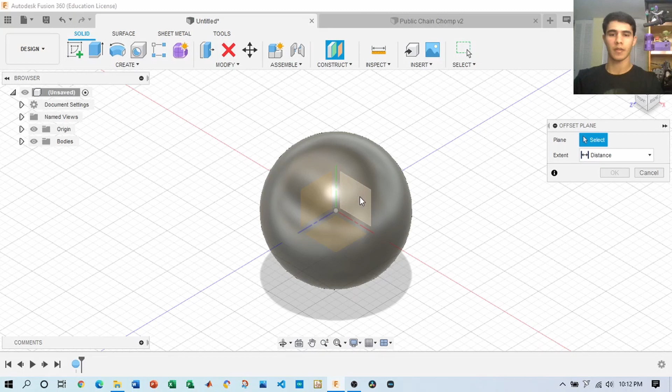Right out of the bat, we got most of the work done for the general shape of the Chain Chomp. Now what we're going to do is construct an offset plane to this sphere, and this offset plane is where we're going to make the sketches.

Let's go ahead and make this offset plane 60. 40 is good. And then, as you'll notice, we have under construction our plane.

If you want to, you can disable it, just click on the eye icon. Let's say we want to edit this plane. I want to switch it from the orientation it's currently at.

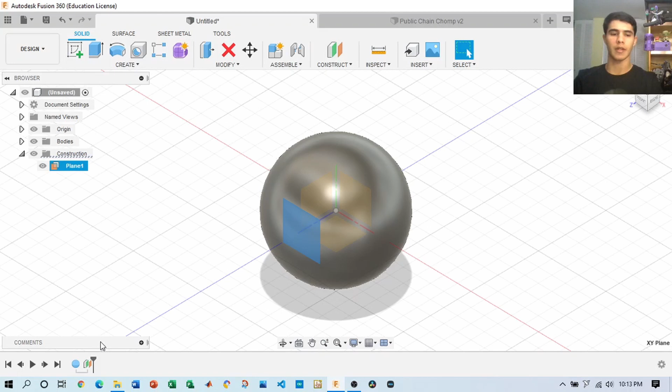So all I need to do is click here, edit feature. And let's say I want to switch from this plane to this plane. Now it's 40 millimeters on this other plane.

Perfect. Now we're going to create a sketch. And on the sketch we're going to make a cut for the mouth of this Chain Chomp. 40.

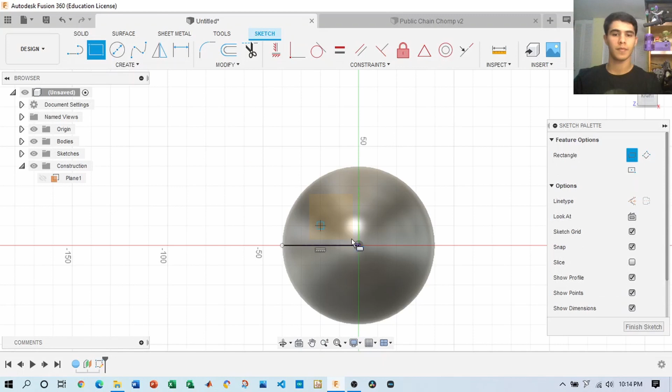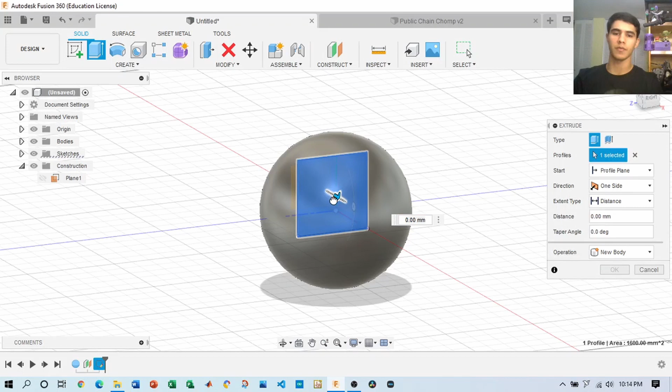So we made a square, and now we're going to extrude it. We'll go ahead and click extrude, choose your profile we want to extrude. In this case, we're going to cut through the circle, cut through the sphere.

So it kind of looks like Pac-Man right now, and that's okay, that's what we're going for. We cut through this body, and you'll notice now we have the general profile of the Chain Chomp.

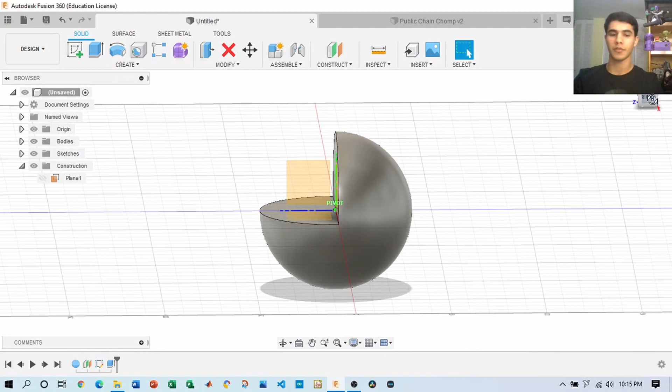So what's next? What you could do next is add the eyes. Just go ahead and add the eyes, and to do that, we can go down here and edit our feature for our previous sketch. Looking at the image of a Chain Chomp next to me, more or less the eyes are situated to the sides of it. I would say here.

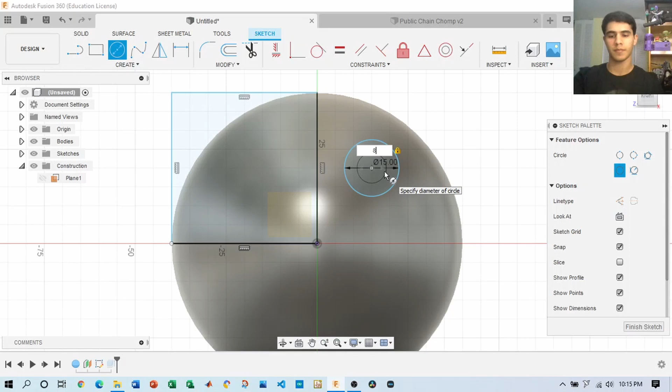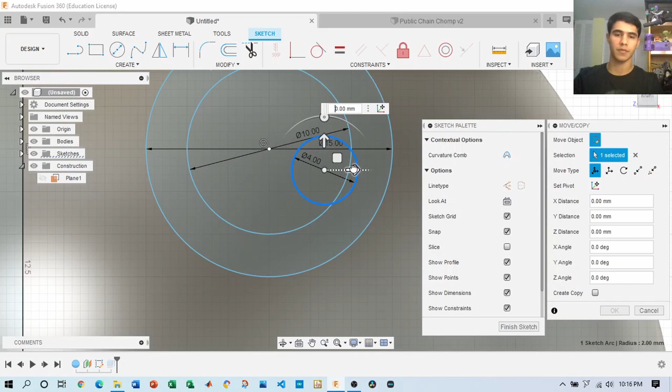On the shortcut, what we can do is click M for move, or you can go here, click on your mouse on the right, and then just click move and copy. And it gives you the option to move your sketch to your preference.

So we have our sketch profile. In this case, it's going to be the eye for the Chain Chomp. So what we're going to do now is create an advanced feature where we extrude this sketch onto the body, and by extruding it, we're going to be able to create a curved surface area.

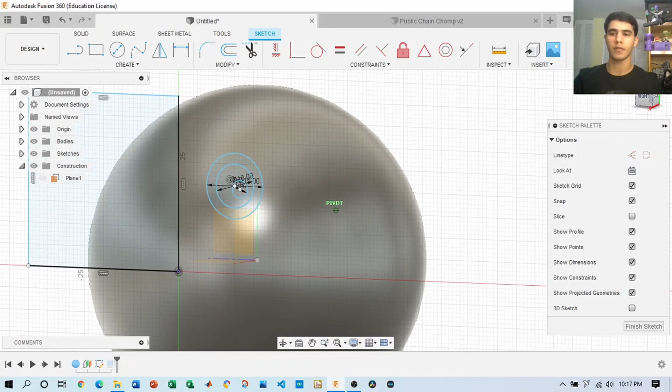Because right now this is a solid body, but it's not curved. So let's go ahead and finish sketch. And you'll notice under sketches, now we have our sketch profile here, along with our plane.

So let's go ahead and extrude our eyes. Before we do that, let's move this body, and it will be necessary for the feature we'll be using in a second. Move and create a copy.

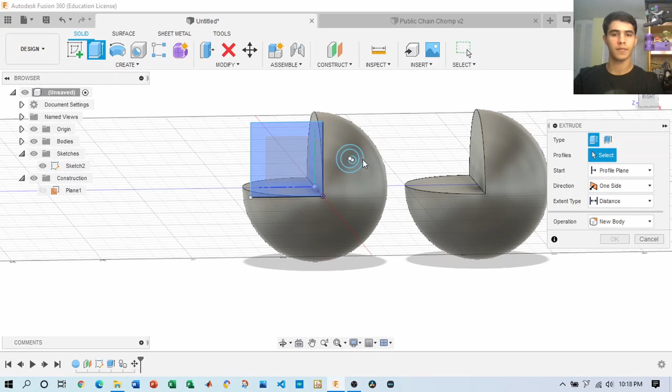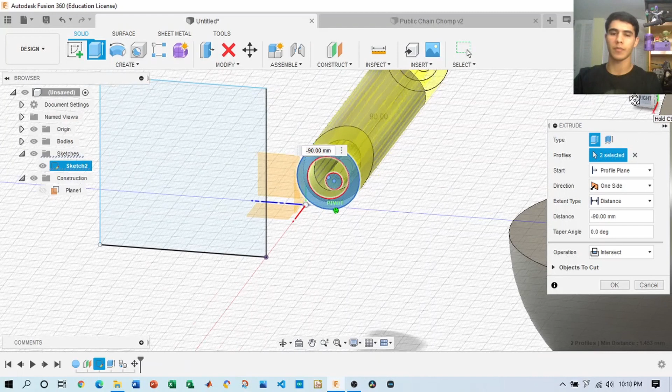And we're going to extrude this now. We're going to extrude it in a way that intersects this sketch profile and the solid body, in this case, of the Chain Chomp. And how does it look like? It looks like this. We're going to need this to make this curved profile for the eyes.

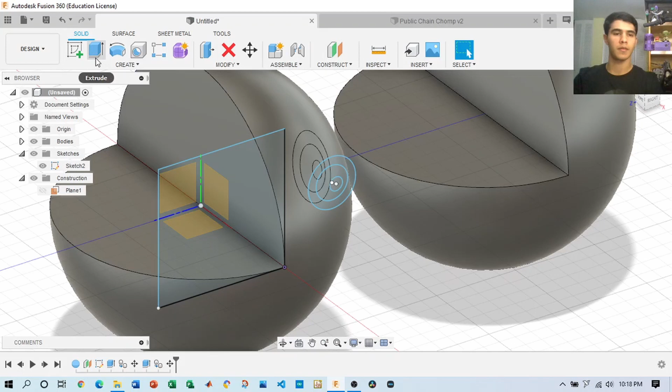Let's repeat this again, and we'll repeat it with the inner eye. This eye profile. Intersect. And we'll intersect in a way that cuts through the solid object. Now we have our eye profile and our main body.

So let's go ahead and move this body back.

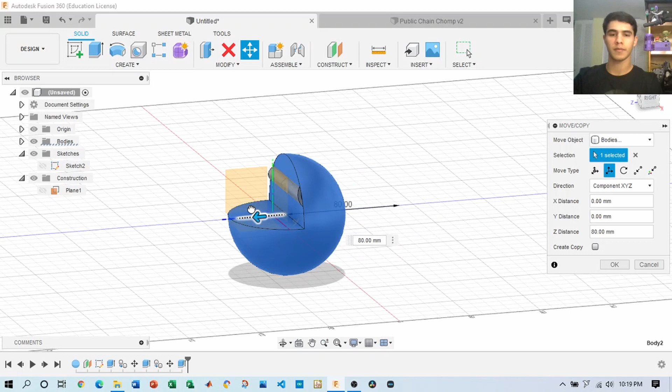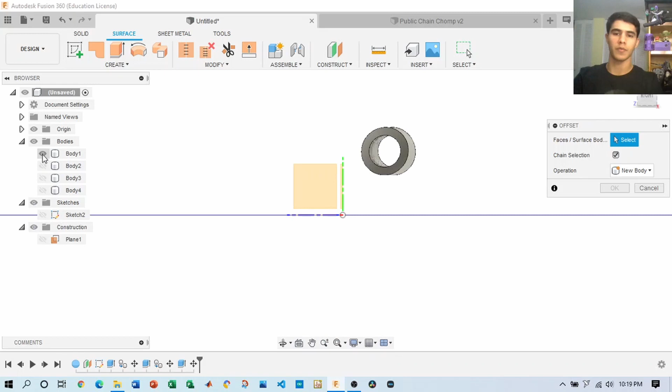With this we can create a surface offset on the eye. Right now this is a solid body, and we have 4 different bodies under it: body 1, body 2, body 3, and body 4. But we don't have any profile on the eyes. Let's say we want to create a sketch or extrude on these eyes - surface offset allows us to create a surface body on these profiles.

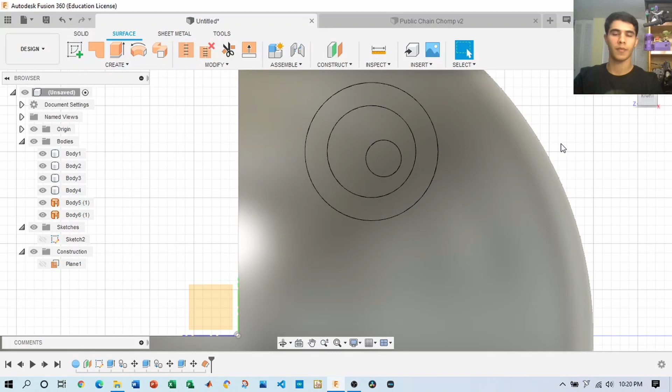You'll notice when you add these new surface bodies, they're directly on the surface of the profile that was there before. So we'll repeat this with the inner eye, and now we can go ahead and thicken it.

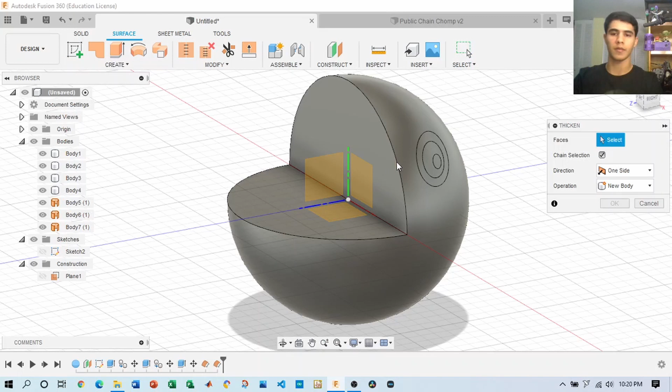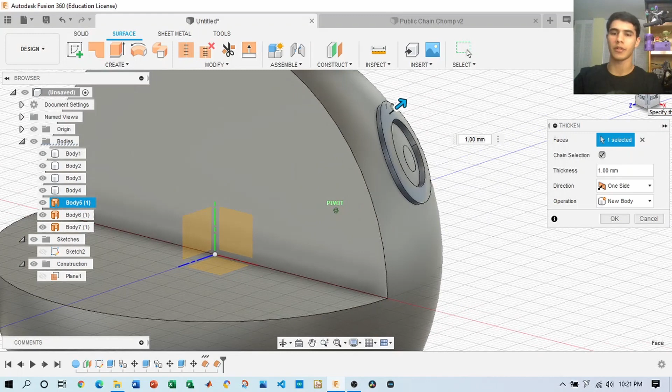Thickening is going to create a natural thickness on the surface offset, which gives the impression, when you 3D print it, of a thicker layer. You see how you're now extruding on a curved area? Just go ahead and change these values to your preference.

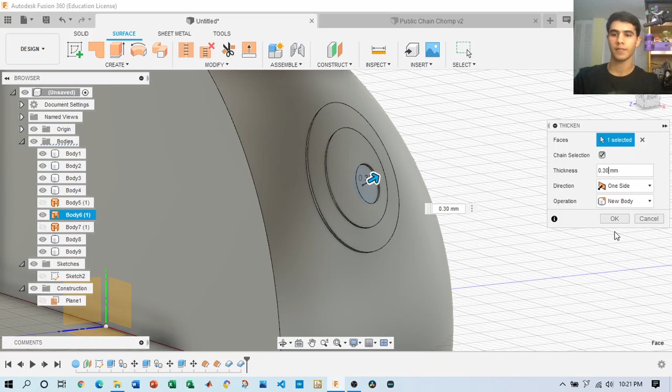So we have it on one side, and you notice we can repeat the same function on the other side. Let's go ahead and do that. We want to mirror the features we incorporated right here, along this plane. And now we have an identical feature on the other side of the chain chomp.

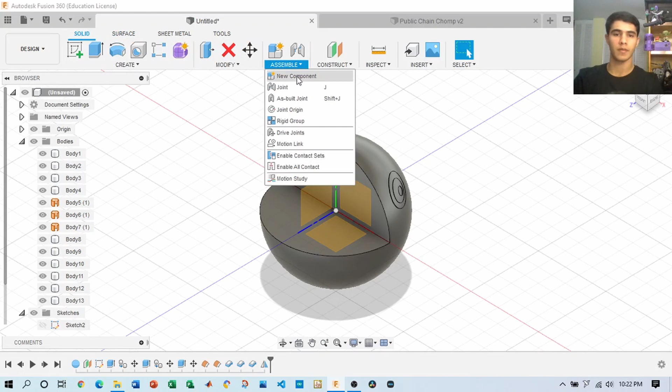If you want, you can go ahead and combine these different bodies, since you have several here. So we go back to our solid, click modify, and combine body 1, body 2, body 3, and body 4, with the operation set to join. Now, if we take away the body, we will just have our eyepieces.

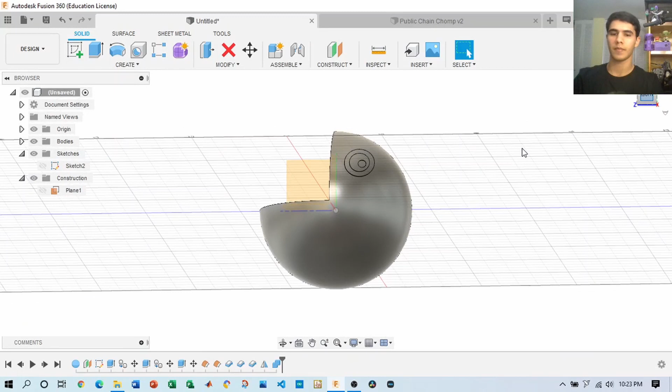Cool, so what's next? Next you want to make the actual chain for chain chomp. So looking at the axis, the chain is located somewhere over here, right? Let's go ahead and enter our profile over here.

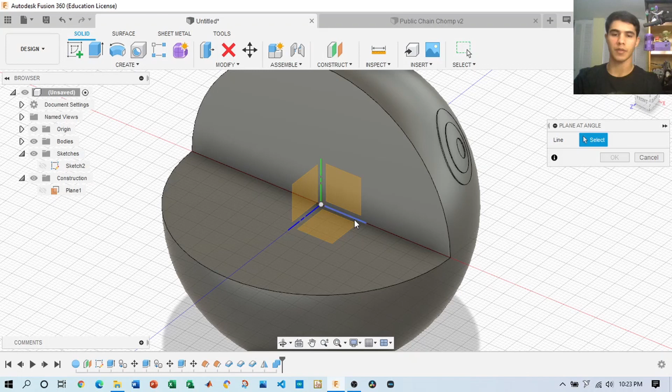That will allow us to add that chain. So we're going to put a plane at an angle, using this axis to create a new plane that's 45 degrees to this line. Then we'll construct an offset plane off this angled plane, 40 millimeters off in the sphere.

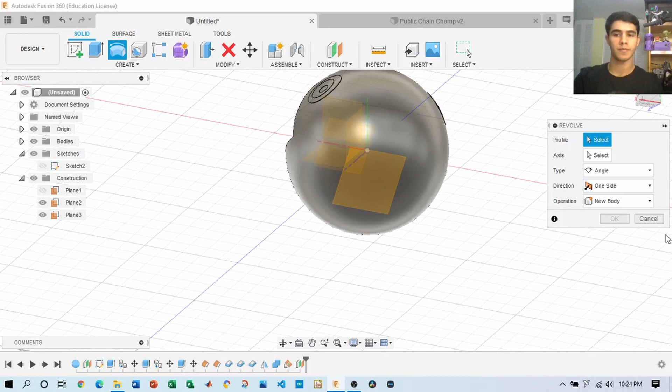And if you look at it now, we can draw our sketch. Once you're satisfied, click Finish Sketch, and then extrude it. But what's different with this feature is we'll be adding an angle to the extrude, in this case called a taper angle.

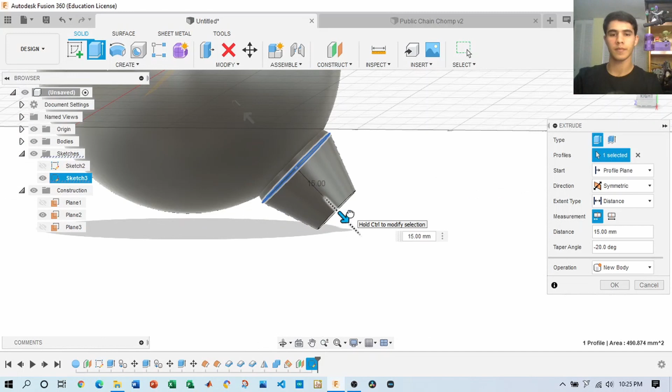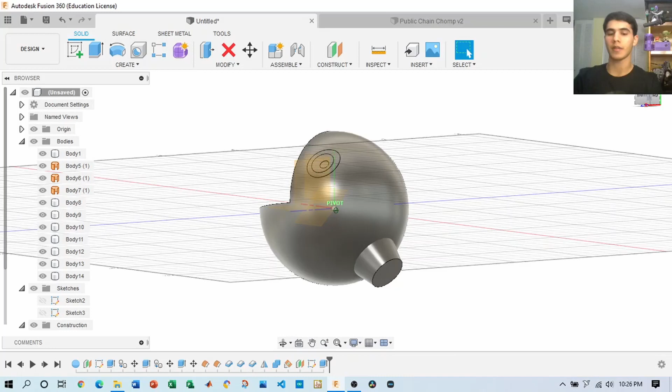So there we have our two taper angles. Bring back our body. That allows us to now draw the chain links on this chain base.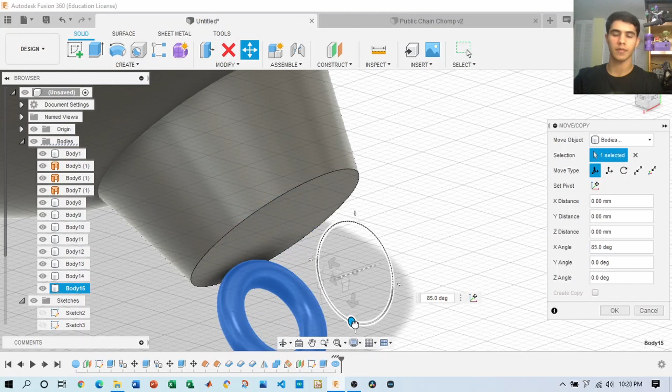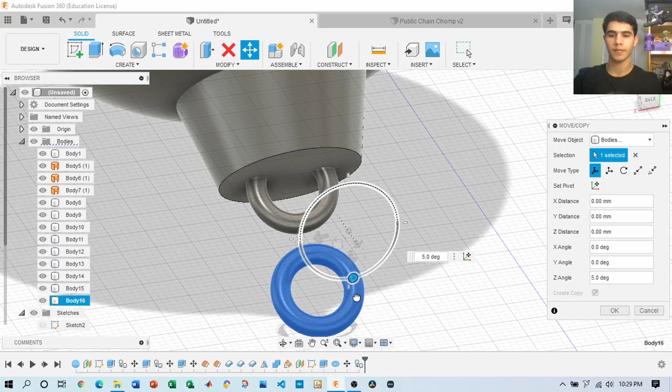We'll do that using a torus feature, and we'll be repeating this feature for all the chain links. And there you go - there's your chain.

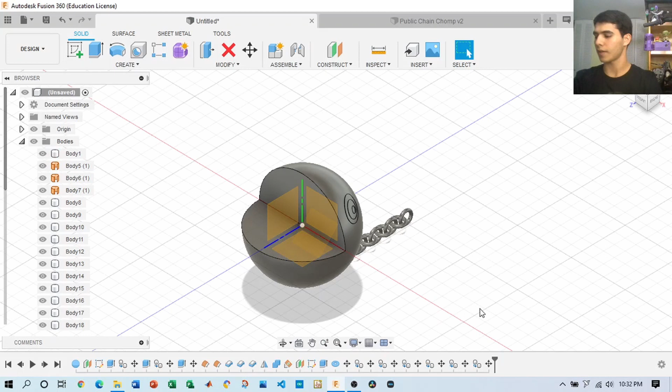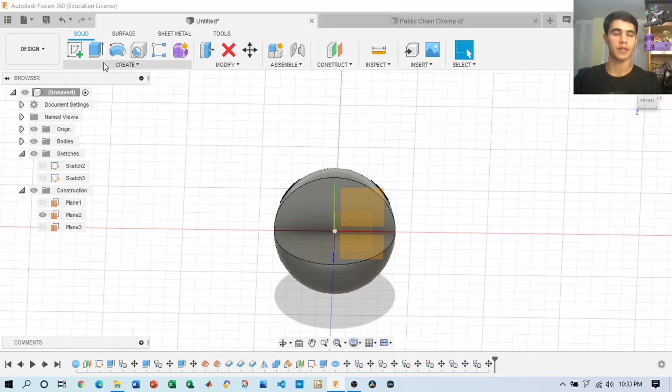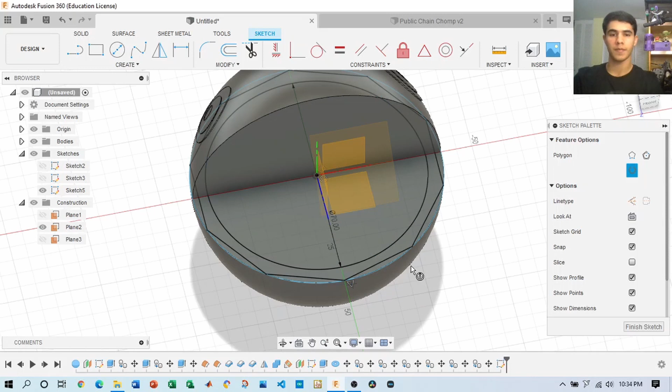Let's go ahead and do that. We first begin with creating a sketch on our teeth. Let's make a circle, and that allows us to make a polygon. With this polygon, we'll be able to make the shapes for the bottom row and for the top row.

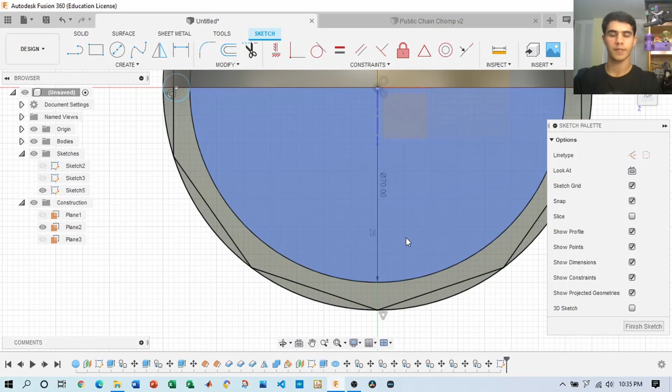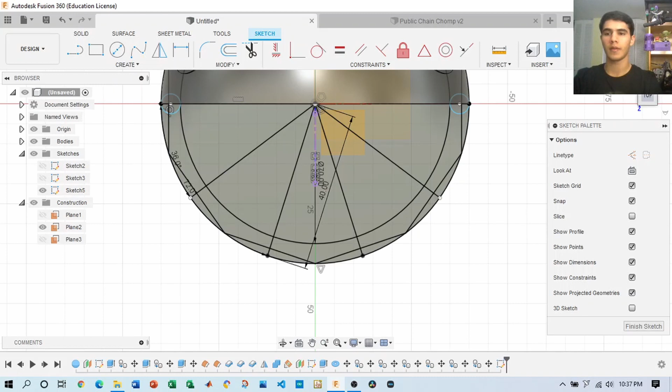With the polygon, we'll be using lines to assist us. And there you go - now we have a guide by which we'll be placing these circles and forming our teeth. Cool, so we finish our sketch, and repeat for the top.

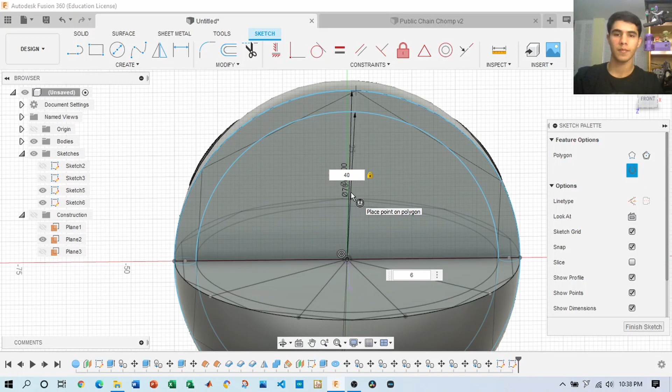On the top row, we have 4 teeth, so in this case let's do an inscribed polygon. Now we can draw our lines. In this case, we have 180 divided by 4, which is 45 degrees each.

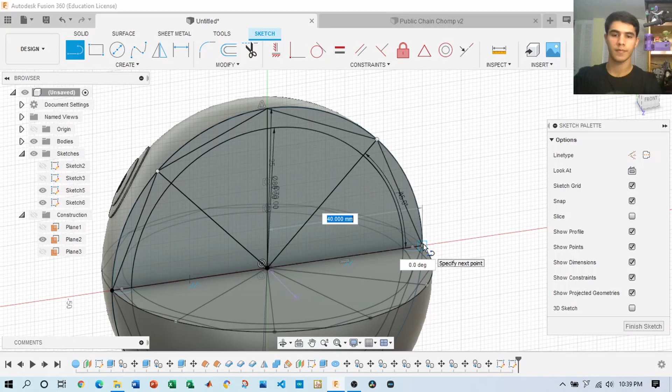Looking at our sketches, what we need to do is create the profile of the teeth. Since the teeth are a triangle shape, if we extrude it upward, we still need to cut out the shape of the teeth as a triangle.

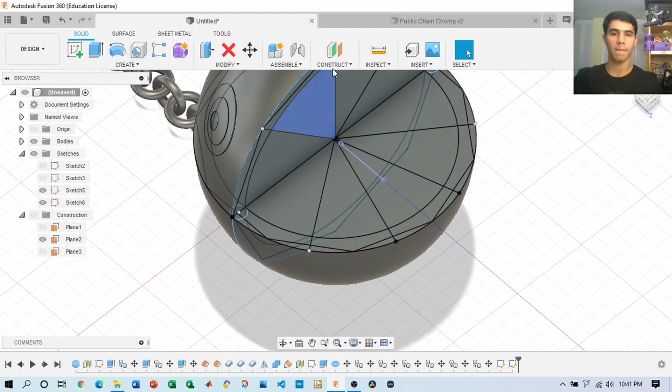To do that, we'll be adding a sketch plane on each of these points where the teeth are. So let's put a plane at an angle. Cool, so now we have our points.

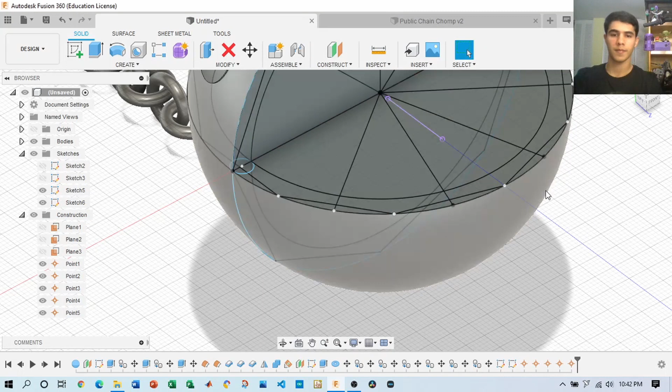Now what we'll be doing is inserting a line along this point - we have a tangent line right there. We'll repeat this for each of our points, making these lines coincident and tangent so that they're on the profile I want to include.

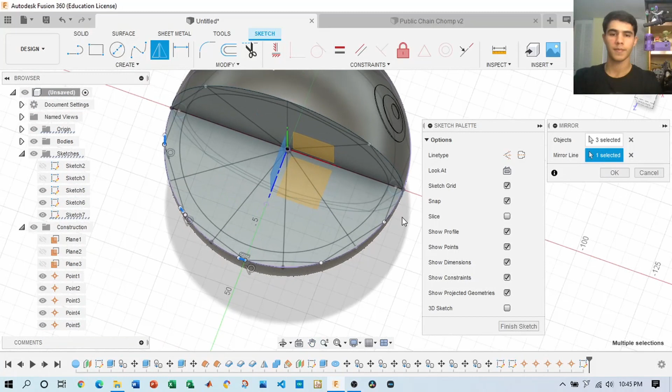Let's go ahead and create the plane for these bodies. And now we can go ahead and create our profiles.

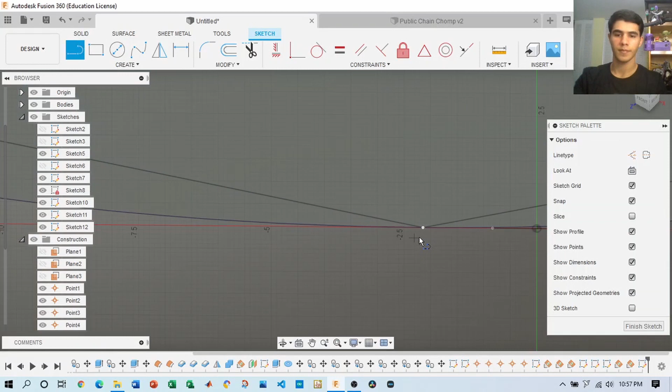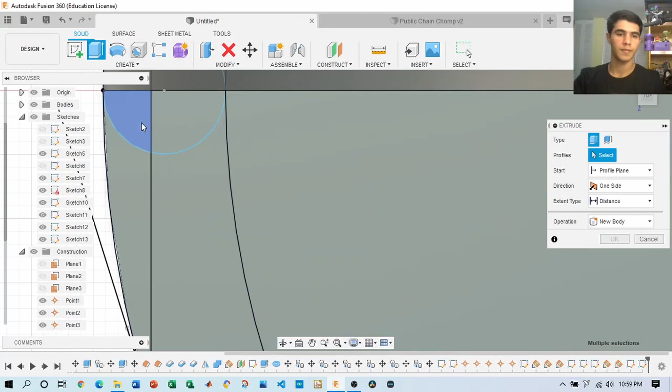So now we have our sketch profiles on both sides, and what we can do now is we can extrude. And what I will do is create a segment for this profile. And now we'll do another extrude on this teeth looking profile, triangle profile, and cut into the original profile.

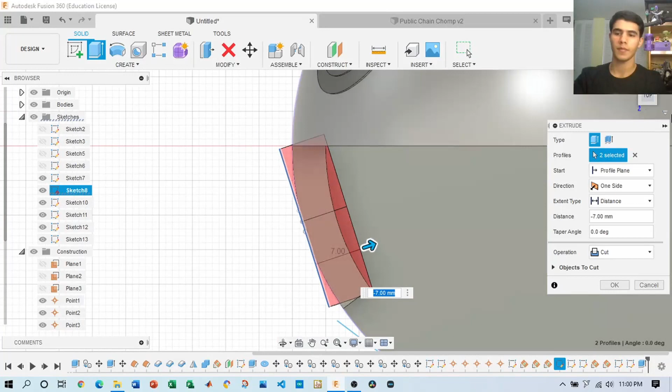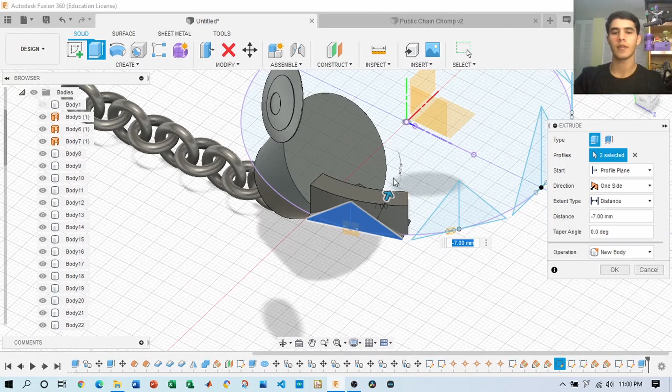And we'll be doing an intersect operation. What we can do is we want to preserve this body, because if we do intersect as it is right now, we'll lose the entire body. So instead we go to our bodies and hide body 1. That prevents it from being viewed by Fusion 360 into this intersect component. And as you can see now, once we do the intersect, it will just intersect the triangle, nothing else.

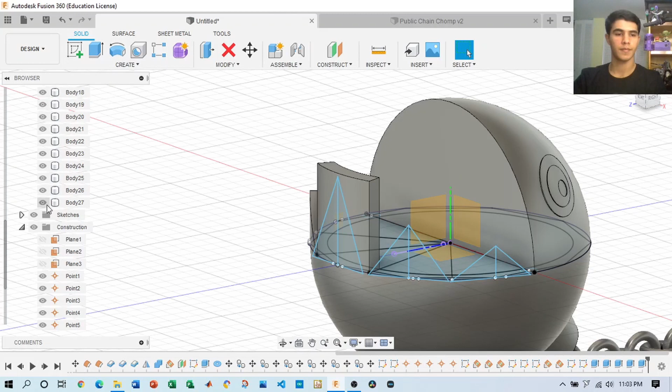So let's repeat this for all the different triangles. This is how it looks so far. So let's go ahead and make the top profile.

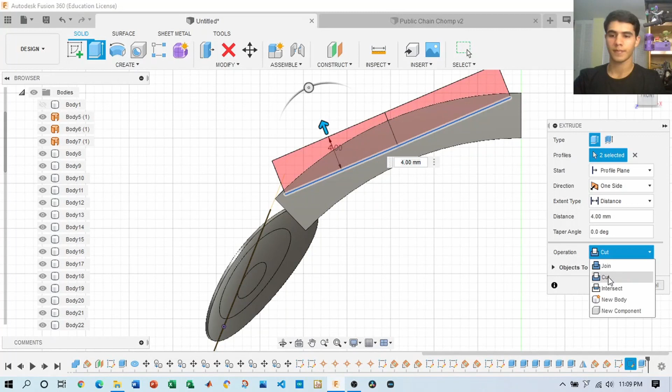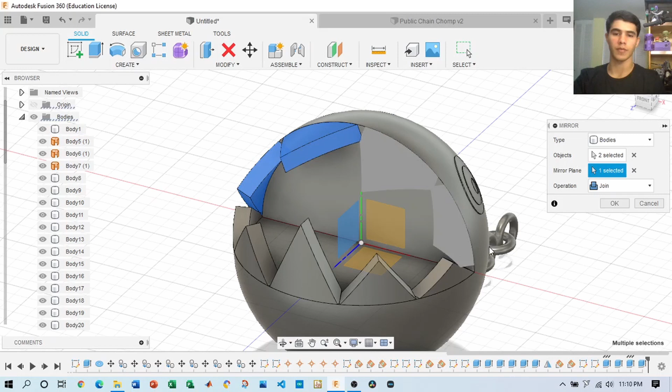And so now, once we have the profile done on both sides, we can mirror the profile on the other side. And there's your chain chomp. So if you want to, you can make these teeth bigger, that's your preference. Let's go ahead and look at all these bodies.

Let's go ahead and combine them so we can simplify our lives. You could combine them if you want to, if not, that's fine as it is.

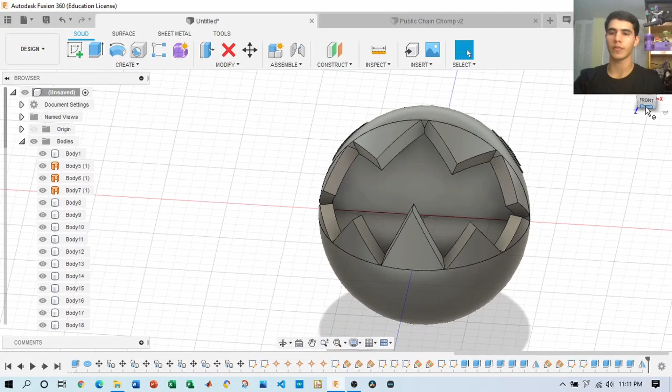So what's next? You have our chain chomp, and you could add some colors to it. So let's go ahead and add some nice colors to this material properties.

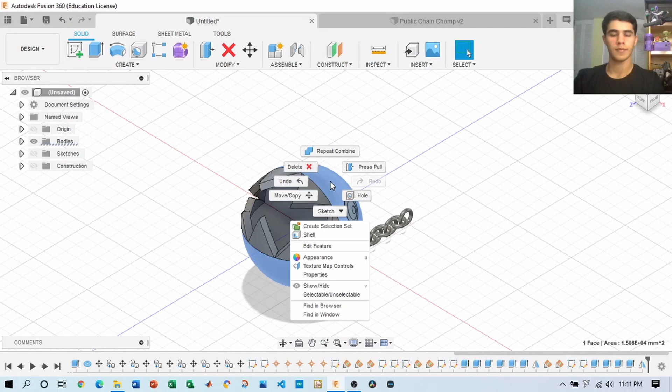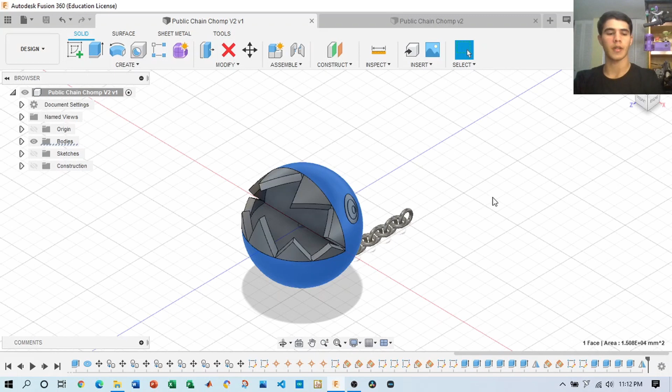So let's add the material properties, and to do that we go to appearance. Once we click the appearance tab, it'll open a selection of our different components. Right now we have bodies and components. We only have actually several bodies. We check, we have 33 bodies, but we only have one component. So we can apply colors and materials to bodies or components, and components and assemblies, which is why a component could have multiple bodies. Or we could apply it to faces.

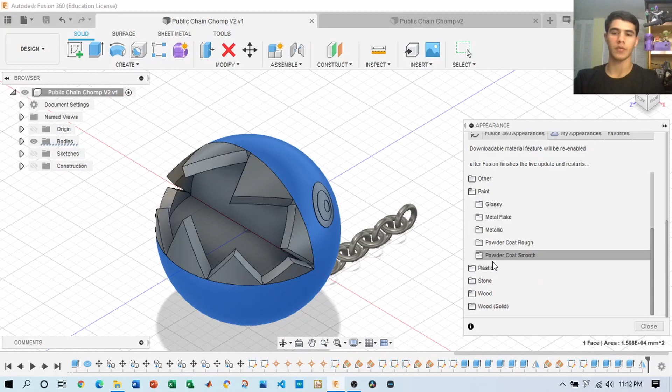In this case, let's apply it to a component and our body. Let's go to paint, and what we'll be doing is add a glossy finish, and let's just pick blue. And so, as you can see, it applied a glossy blue finish to our component, which is this body 1.

So another thing you can do is, if you want to change or edit the shade of blue, you can do that here. Let's say you want to make a darker shade of blue. It's a nice shade, we like it. We can keep it there.

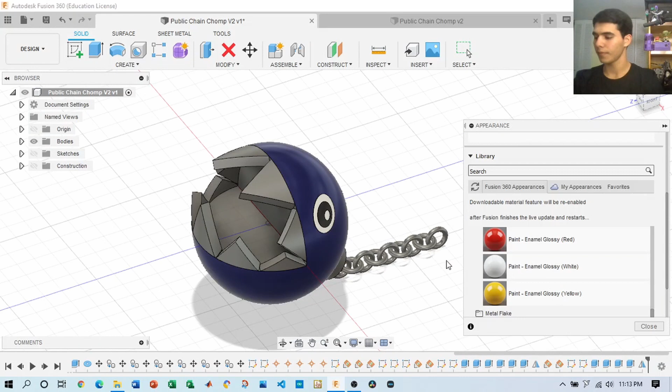Let's go ahead and make the eye sockets, a color for that one. And we have white for the eyepiece. And for the teeth, let's do yellow. Over here we have our eye socket again.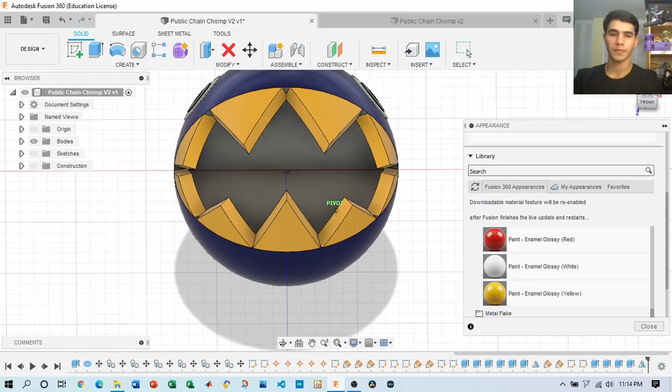Nice. So we go up here to our yellow, and we want to change it so it's a little bit more pale. Let's make it a different shade of white, not too bright as our eye socket white, but just bright enough that we can see it. There you go, that's good.

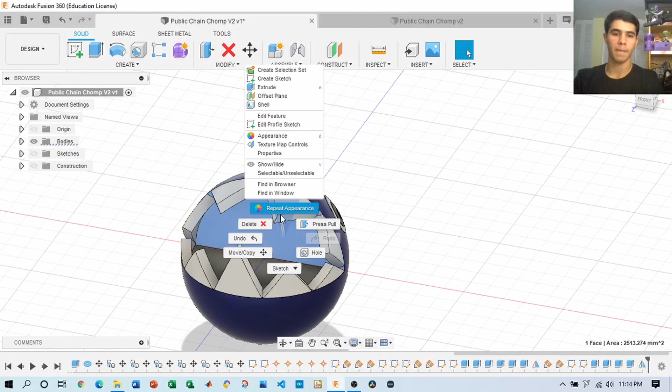And now we have to add our red for the mouth. Let's put a glossy red. In this case, let's apply it only to the face. And there we go, we have a red. Let's change the color to make it more dark, darker red.

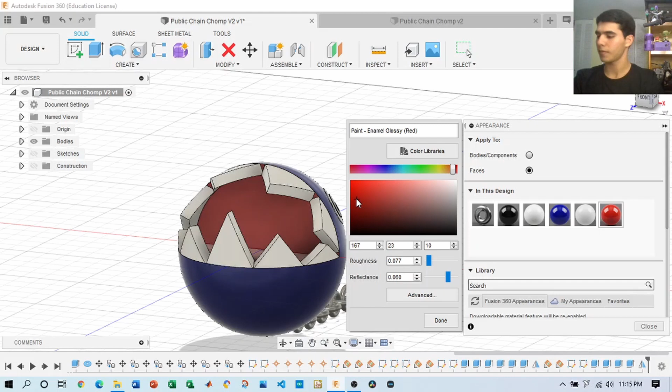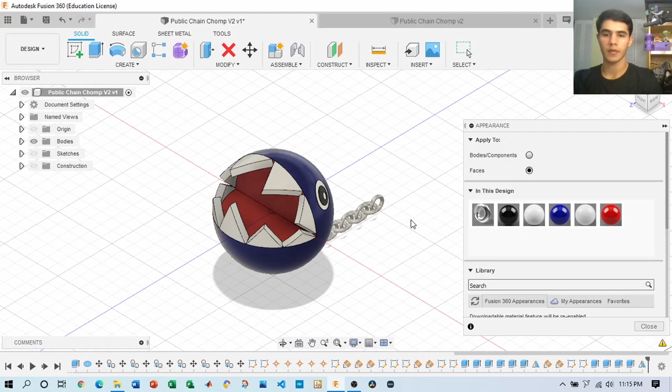So what we can do now is we can apply material properties and color properties to the chain. Let's do that. We can make this steel brighter. I finished that there. Although the chain does look darker, let's make the chain darker. How about that? Looks better, right?

So now that we're satisfied with the different material and color properties, what we can do now is do a quick save, and we go to render.

So what rendering does is open a virtual studio where we can play with different features, optical features, reflectance features, and with that we can create a nice picture of our object that's presentable and digitally designed. So we go ahead and wait for our rendering studio to open.

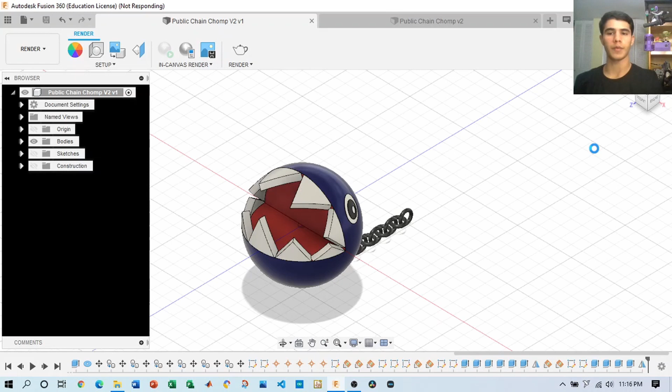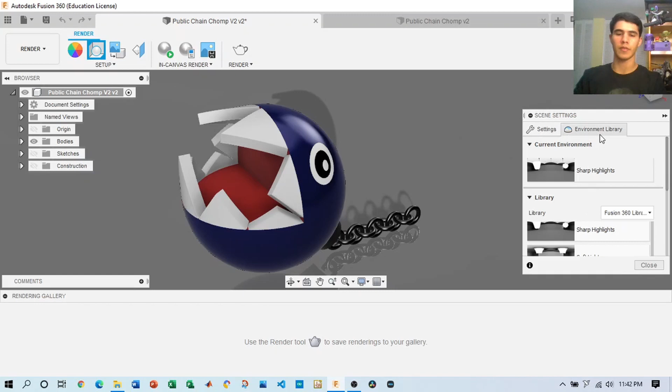And that pulls up our studio. So we find a nice suitable angle we would like to render at, and we click on our setups. Once you have a nice angle and setup you prefer, you go to render, and you can initiate the render.

And what that does, it's going to basically take all these images, these components that you inputted, and create as an output a professional image with the different lighting, the different angle, the material properties, and the optical properties as well, the reflectance, right here down in the rendering gallery.

In the meantime, what you could do, you can go here, capture image, and it's going to save this workspace as an image, so you can have your image saved.